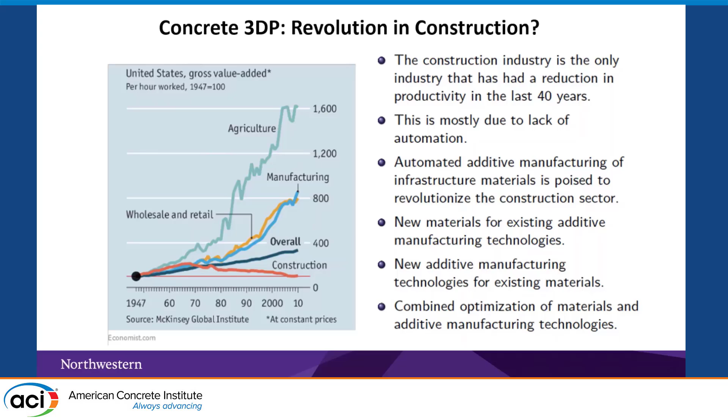There was an analysis done by McKinsey where they showed that the root of this problem is the lack of embracing automation. And so 3D printing is one way to bring at least some of that automation. There are many other automation things that we can do in construction, but this is one. It really is a revolution.

And of course, the question is really, is additive manufacturing ready for prime time? You know, there are many companies, I suppose some of them are in this room, maybe not, I don't know. But first of all, I have 'concrete' on quotes, right?

If you follow me, what I say, what I do, I say, if we want to have a revolution, we need to bring concrete. And we don't bring concrete, we bring mortar at best. For the presentations of my colleagues before that, they were all mortar. And there's no revolution in mortar. So we need to bring concrete. That's the first concept, one concept to take away from my presentation.

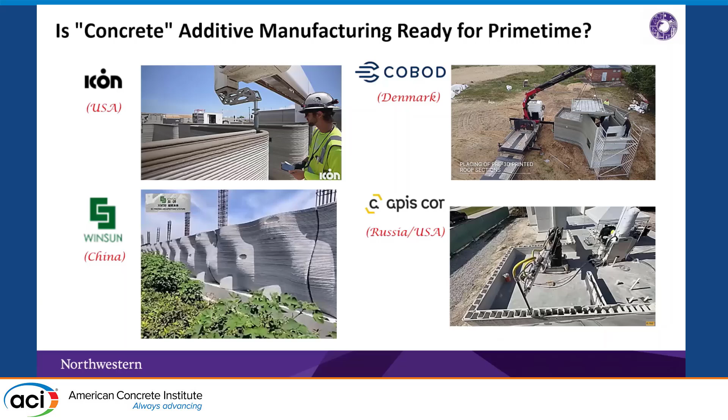Second concept is, okay, we print it, they look beautiful, they are fantastic. But we are structural engineers, right? So we want to have a way to design those structures, not just print them over and over until you get it right. We want to be able to design those structures, and design means two things: design the 3D printing process, because now it's not just casting, and be able to calculate the load carrying capacity of these printed structures. We need those two things.

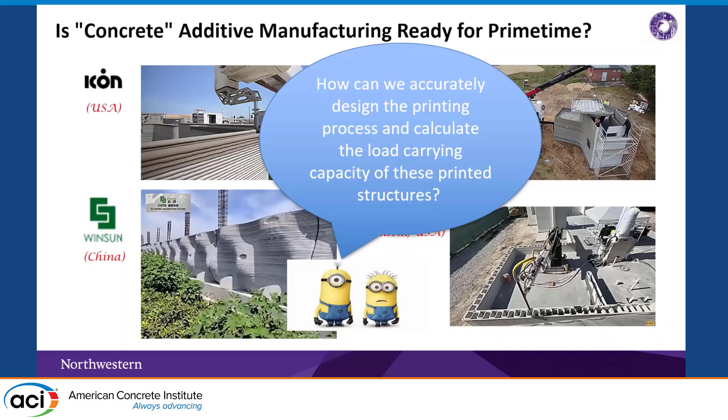So what is the solution? One is design by trial and error, large-scale testing. Many people are doing this. They'll try, and get it right, and then build big walls and test them.

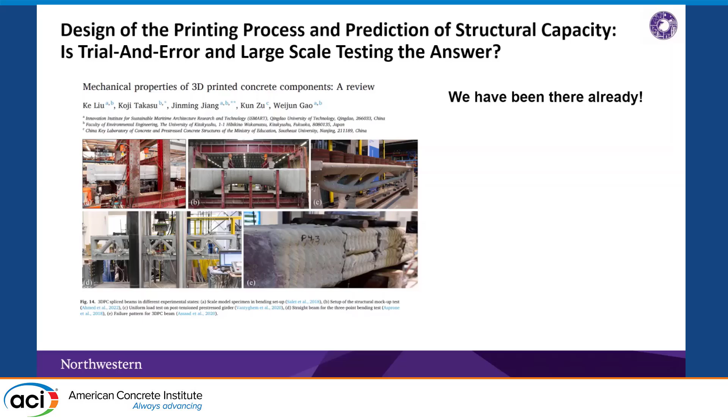My argument is that we have been there already, and it doesn't work, it cannot work. The image I'd show here is the Duomo di Milano, which my colleagues from Italy know. It began construction in 1386. It was completed in 1805. Why? Because it was trial and error -- they built until it collapsed, then started again with a larger column. That's trial and error.

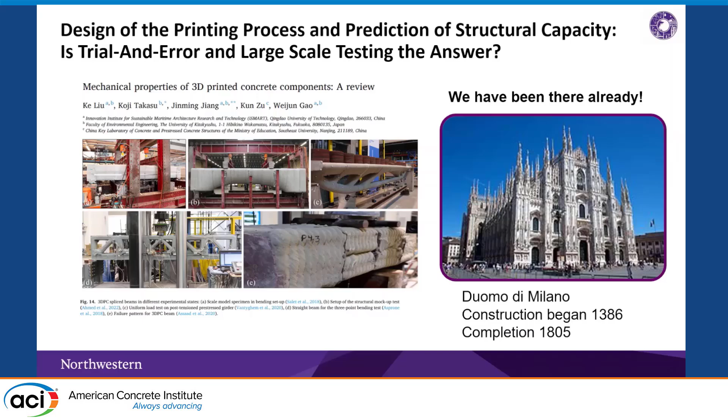Now, we have made a lot of progress since then. So we don't do that at the structural level anymore, but what I do see in 3D printing is that we are still doing that at the structural level, because we don't really have methods to predict those things.

So what is my vision? I think we need to do experiments, and experiments are extremely important, but they need to be at a small scale, in the lab, not large scale. We need to measure rheological properties, we need to measure hardened properties, and, most importantly I think, we need to study the setting of the fluid to solid transition, which is one of the most important things in 3D printing.

Then we need computations. We have big computers -- it seems strange to me that in this community we are still afraid of computers. We need to really have computational frameworks that do all the rest; we don't need to test walls.

We don't need to test large-scale beams, other than for validation of those models. And of course we need validated models, uncertainty quantification, good solvers, artificial intelligence -- we can take advantage of a lot of those innovations in computer technology, cloud computing, quantum computing, GPUs, all the things that drive our cars. So if those things drive our cars, why can't they design our structures?

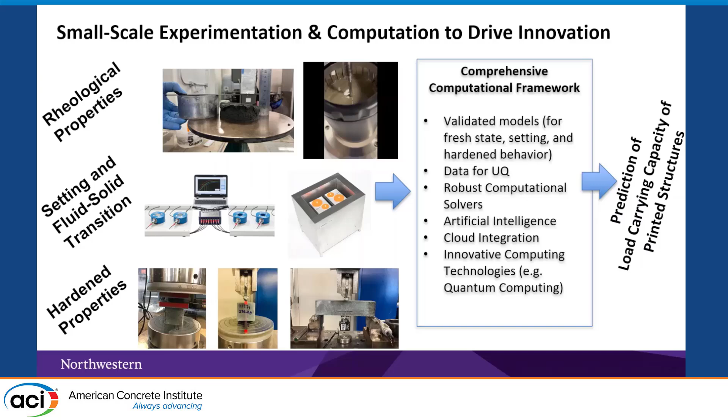So what we have been doing is trying to bring all those things into one computational framework and do that as accurately as possible.

This is one model developed with my colleagues and collaborators from Ohio University and in China. Here is a very high fidelity model -- we simulate aggregate pieces, because this is concrete, with the actual size distribution, particle size distribution, shape, and everything.

The mortar, the fine mortar or cement paste, depending on the resolution, it's a fluid, the particles are rigid, that makes sense. We have fibers. Of course, fibers is important, but lots of things. We are doing, for this project, work on ultra high performance concrete, where you do have fibers.

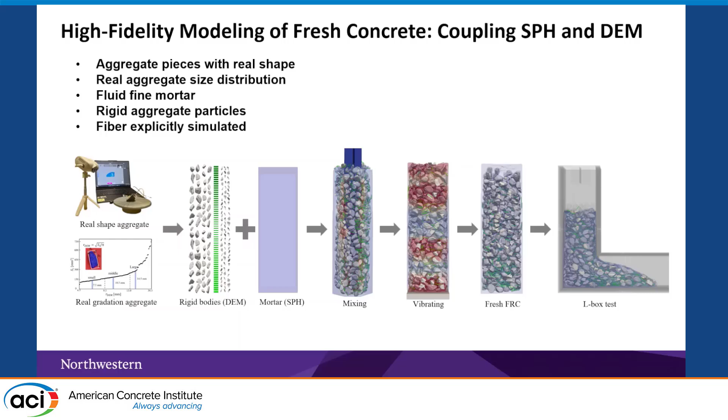You don't have coarse aggregate, but you do have fibers. And so we put it all together. This is the aggregate rigid bodies with discrete element method, coupled with smooth particle hydrodynamics for the fluid, and mix them, vibrating them. So you do all the things that you actually do in the lab, and then you simulate, for example, in this case, L-box. Okay, and the nice thing is that if you do this, it's very accurate.

By the way, this was a GPU implementation, so not even that computation intensive. This simulation runs in like 4 or 5 hours, okay, which is absolutely acceptable. And the nice thing, and there's a paper, I forgot to mention, to put the reference here, but there's a paper where we analyzed, based on this type of simulation, how the flow aligns fibers.

That is, in 3D printing, if you have done ever a 3D printing with fibers, you will see all aligned in the direction of flow. And here in these pictures, I'm going to, again, it's in the paper, but we are tracking the alignment of fibers in certain places. We are tracking how also the flow might break down agglomerates of fibers that we often have in these mixes.

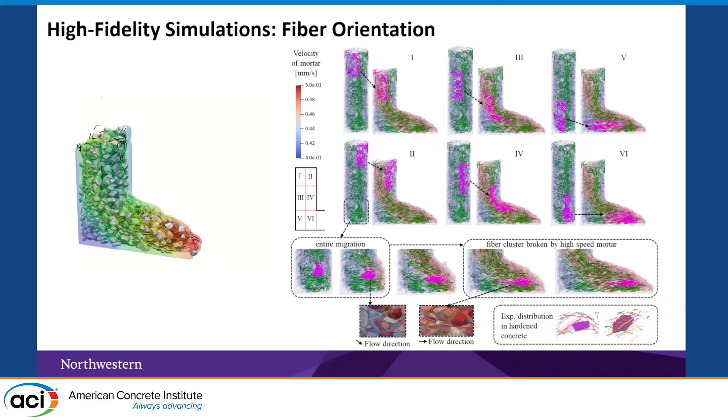Now, of course, this is high fidelity. You can do small things. What about if you want to do something that is a little bit more still accurate but approximated? So what you can do is get rid of the fluid. So you can get rid of the SPH and have just DEM, and then have some equivalent contact laws that somehow represent all the effect of the fluid in between.

So we have developed this discrete fresh concrete model, including the fibers. In this case, the shape, the aggregates are not the real shape. It's just approximately spheres. We still have the real aggregate size distribution. Fluid mortar is not explicitly there, and we can simulate fibers explicitly.

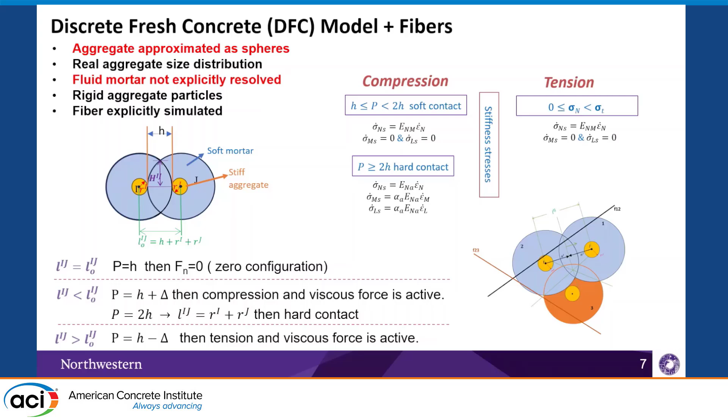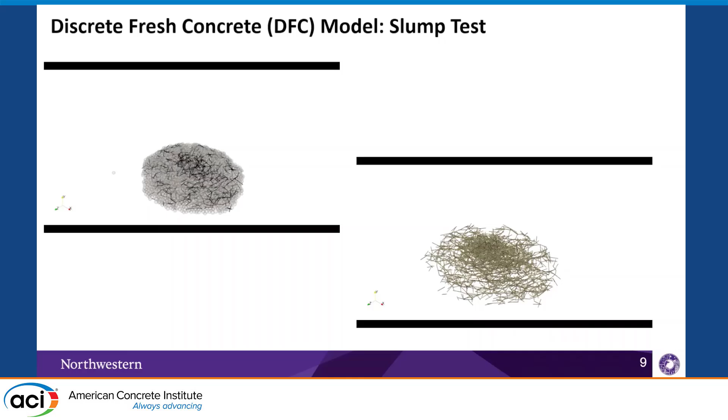Again, in the interest of time, I just want to give you just a vignette of what we are doing, so I'm not going to skip completely the description of the math. As far as the math is concerned, we are using, of course, the Bingham model, nonlinear Bingham model, with thixotropy, right? So thixotropy is one important aspect. So those are all embedded in the constitutive equations.

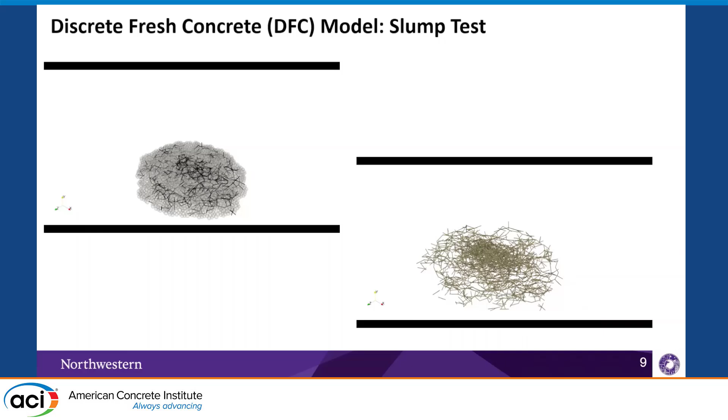And here you see, of course, as you have a slump test, for example, how you move the fibers together with the material, and you can have some of those final fiber distributions. This is another simulation, an L box, same thing.

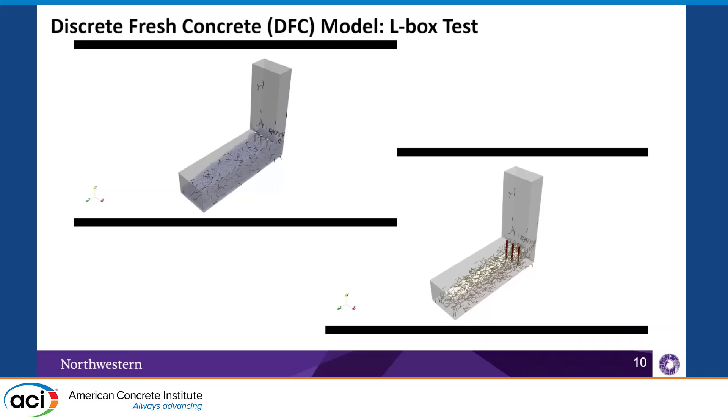Now, of course, here, you might see there are some weird stuff that the fibers do here and here and here, and that's because of the resolution, right? If the fibers are too small compared to the size of the particles, then of course this doesn't work, because you don't have enough resolution for the contacts to develop. And those are some of the situations that you have here. But still, you can see some of the features that you would see in those simulations.

One step further, if you don't want to have the fibers, or you just want to do DEM, there is a lot of literature, and this is one paper from 1922. Okay, so it's not that the science is not there. So this is all papers where they studied how fibers flow if they are in a fluid, okay?

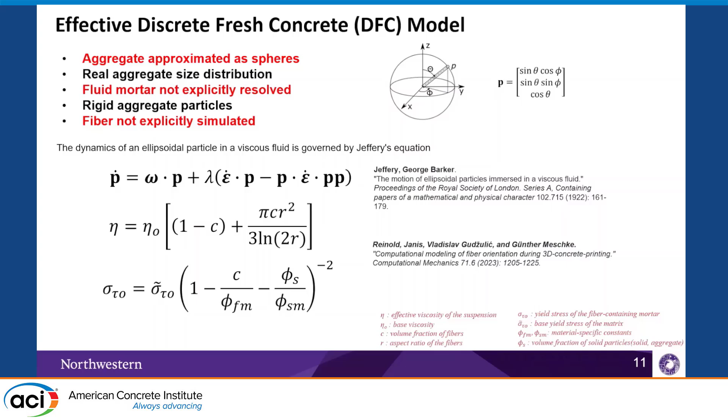And Jeffery came up with this equation where if P is the orientation of one fiber, it says, okay, P dot is the orientation change in time, and this is a function of epsilon dot, which is the usual strain rate tensor, and omega, which is the anti-symmetric component, which is the curl of the velocity field. And then, of course, if you do that, then you don't need to put the fiber explicitly, you just do the flow. But of course, you need to have some equivalent rheological properties that account for the effect of the fibers.

Skip this. All right, now fluid to solid transition.

These are the things that we are working on now. So now we really want to have in one single model the transition from fluid to solid. By the way, it's a philosophical question of what's a fluid and what's a solid, okay? We can entertain that philosophical question in other sessions.

What we do here is we have this discrete fresh concrete model, where when the flow ends, the topology doesn't change. If the topology doesn't change, you can couple it with LDPM, the lattice discrete particle model, which we've been using for 20 years to simulate the hardening property of concrete. You can make them work together. As you transition, some portion of the material is still fluid, some portion is hardening, and they're together until you fully transition to a solid. The nice thing is those two models are compatible, in the sense they're built on the same principle, which is simulating the coarse aggregate pieces in the material.

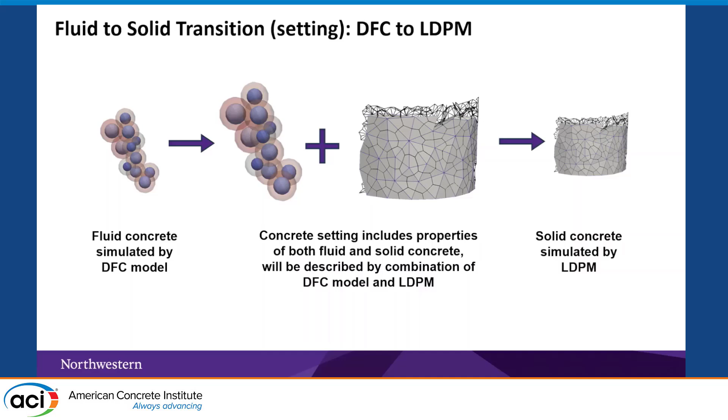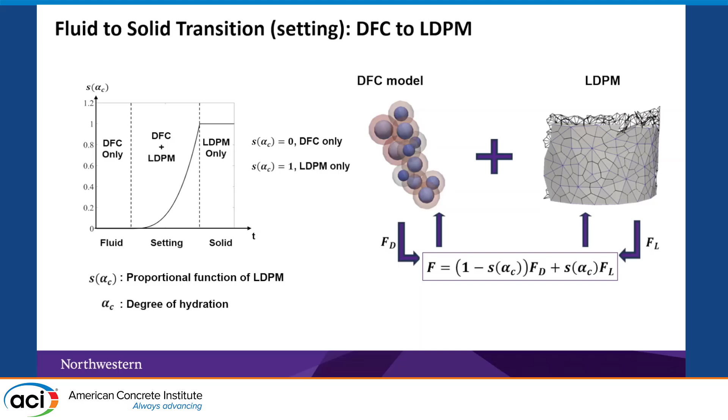Now, there are some details: when you have a DFC simulation, you need to reconstruct the surface. This is fine. The one thing we're working on now is the definition of a function which weights the two models at any given time. That's what we call the setting function. That setting function is a function of degree of hydration, of course. It needs to be related to the chemistry and how hydration progresses in the material.

Now, setting. The setting is important. At one past convention in the 3D printing committee, I asked people, how do we measure setting? And of course the answer is the VICAT test. Well, fine, okay. That's a very crude approximation of how to measure setting.

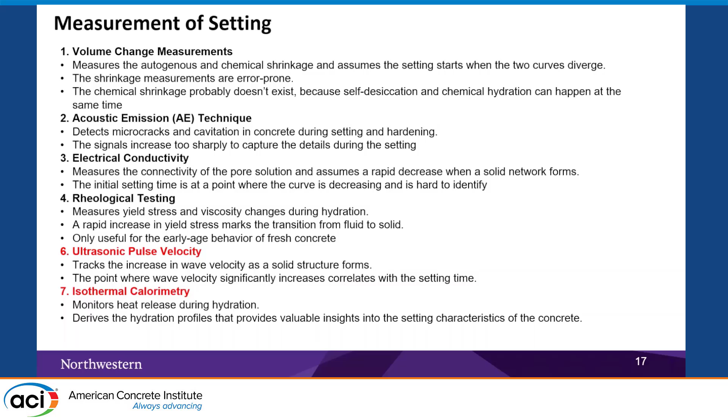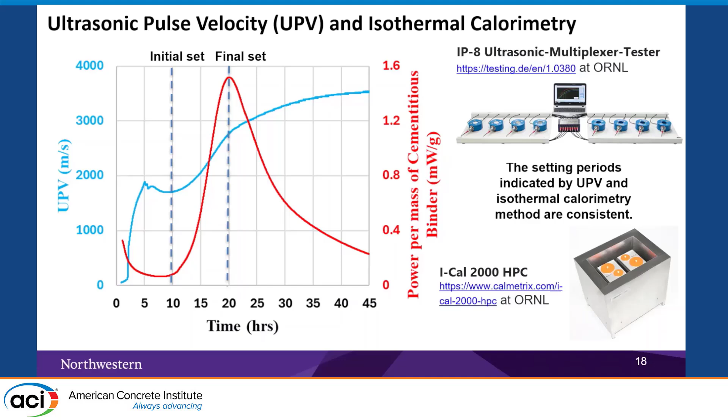There are many different ways, and we've explored many of those to measure setting. Eventually we settled on combining ultrasonic pulse velocity with isothermal calorimetry. These are two examples of two data sets, one for UPV and one for calorimetry. The blue is the UPV, this is calorimetry, and you can identify specific points in those curves that tell you exactly where setting starts, when the dormant period ends, and when you can consider the final set. With this data, which you can get from a very small sample in the lab, it's a really robust way to identify initial set and final set.

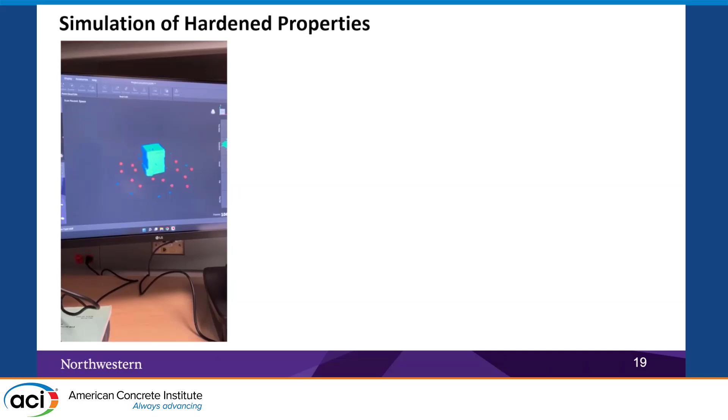And then we end up eventually transitioning to the solid. When we do the solid, we print the stuff, we scan them, we render them, and then we simulate them with LDPM.

By the way, I've seen a lot of finite element calculations of failure and fracture, which is very good. Now, if you do that, please do mesh sensitivity analysis. Softening constitutive equations with finite elements are mesh dependent. We've known that for 30 years. So whenever you show a finite element calculation of fracture, please show me that once you reduce the mesh size, your response doesn't change. Otherwise...

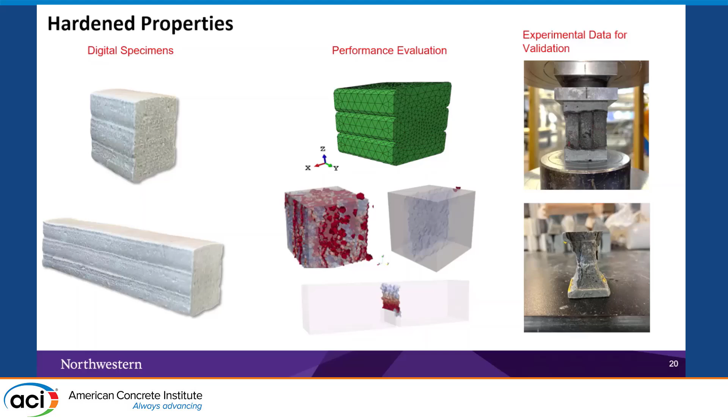So in conclusion, to me the future of concrete printing hinges first on the adoption of performance-based design guidelines. There's a subcommittee at this convention that meets for the first time at 1 p.m. today. Be there, because the subcommittee starts to discuss some of those guidelines. If, God forbid, ACI pushes specification-based guidelines instead, that's the end of the debate. We need to advocate for performance-based design of 3D printed structures if we want to see any future.

Second takeaway: you need models. I mentioned this at the last convention, and I keep mentioning it every time I talk. If anyone in the room is from any 3D printing company, please invest in computations. You're doing beautiful stuff, you have fantastic technology, but if you really want to make an impact, you have to invest in computation, digital twinning, as Francesco mentioned earlier, and these types of things.